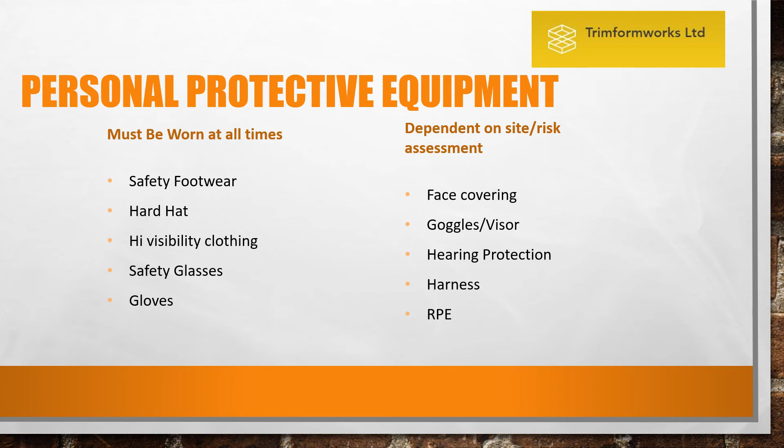Goggles and a visor may be required, such as in cutting activities like cutting of steel. Hearing protection may also be required where there's excessive loud noise. A harness would be required in certain circumstances while working at height. And RPE, respiratory protective equipment, would be required for some cutting activities, including cutting of plywood, any sort of wood materials, and the cutting of concrete.

Permits. The PSCS may require that you have a permit before completing works, and some permits may include hot works permits, close working permits, ladder permits, and confined space permits. Please check with the foreman and the PSCS what is required, and all controls are to be followed. Ensure that you have the correct permit in place before commencing works.

Housekeeping. Trim management will inspect work areas, plant and equipment, and require defects affecting health and safety to be rectified. A clear-as-you-go policy must be adopted and enforced. All equipment, waste and materials must be cleared away as soon as the job is complete. Warning signage is to be used where appropriate and cordless tools are to be used whenever possible.

On the right hand side of the screen you'll see two areas. The first area with the red X is a job that's been completed, however the materials weren't removed. The green tick below shows the same area after it has been cleaned.

Remember, housekeeping is your responsibility. If you make the mess, you clear the mess. Please ensure that you're working within a clean, tidy area at all times.

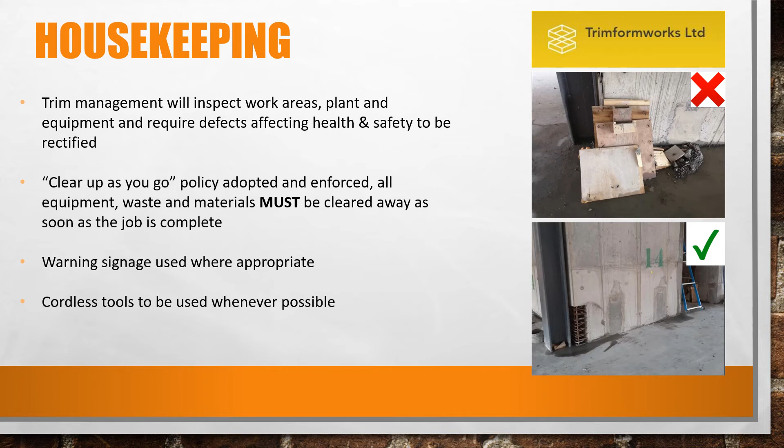Tools, plant and equipment. Only 110-volt tools may be used on the site unless otherwise agreed. Damaged electrical cables should be removed from site ASAP, such as what you see here on the right hand side with the red X. There's been two damages to the sheath and this could cause electrocution.

Do not operate or use tools, plant and equipment unless you're competent to do so. Do not operate any tools, plant or equipment that does not belong to you or another company without permission. All plant, tools and equipment are to be regularly inspected, tested and maintained. Should you bring new tools to site, please make sure they have been declared and added to the plant register.

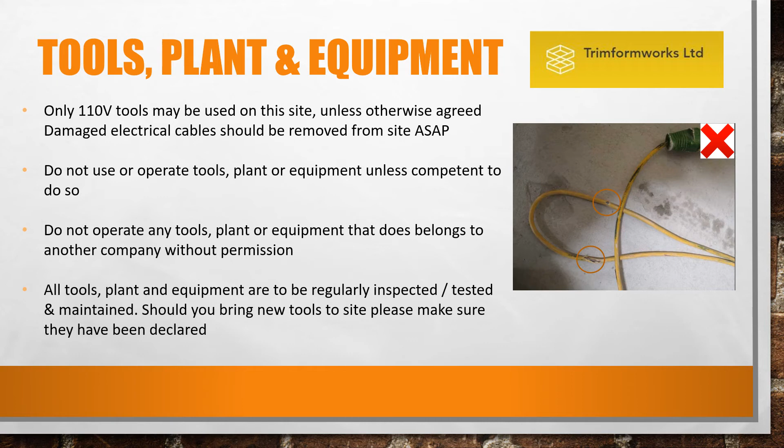Concrete. Concrete and cement products, if not controlled, can cause dermatitis, skin burns, skin sensitization, and eye damage. To mitigate this, you must ensure you clean up your work areas as you go. Avoid contact with the skin. Practice good hygiene and regular hand washing of the arms and the face.

Safe manual handling techniques should be used at all times, and you must wash thoroughly after completing. Use of barrier cream in this instance is also recommended. Full PPE must be worn at all times. There is no exception to this.

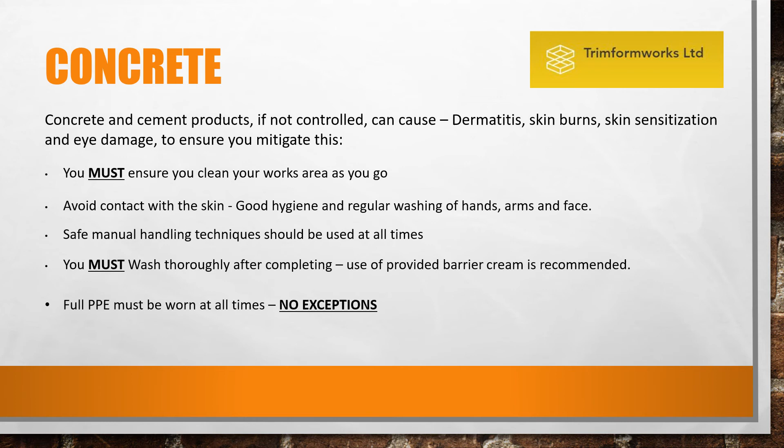Dust. Nuisance dust can often have long-term health effects as well as making you uncomfortable whilst working. If working in dusty conditions, adequate dust masks, either FFP2 or FFP3, and eye protection must be worn. Be aware of others in the area prior to creating dust and advise them that dusty works are about to commence. They may need to leave the area.

Minimize the chance of dust spreading by means of spraying water where possible. This will mean with an adequate connection and a dust suppression bottle—pouring water on the works area will not suffice. Ensure adequate ventilation is being considered where possible.

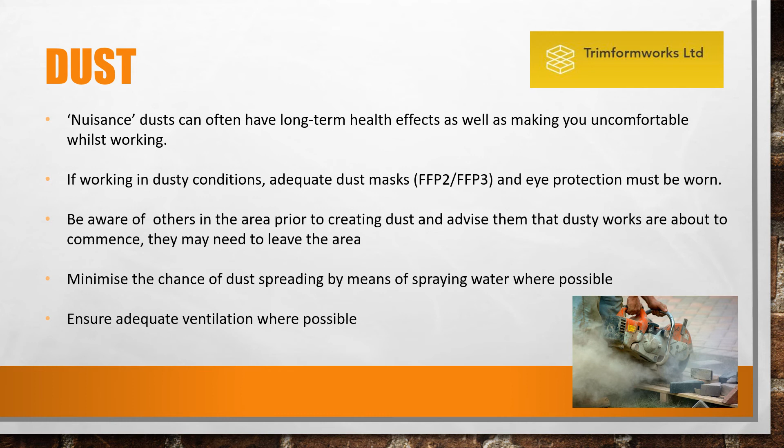Abrasive wheels. Powerful machines such as skill saws and con saws, if not used correctly, can cause serious injury. To use abrasive wheels, you must have been abrasive wheels trained. These machines should only be used and have replacement discs fitted by competent persons in accordance with the abrasive wheels regulations.

When using disc cutters, PPE must always be worn. That will include eye protection, gloves, dust masks, whatever the risk assessment mentions as reasonable PPE use, you must be wearing. Always inspect the discs for wear prior to use.

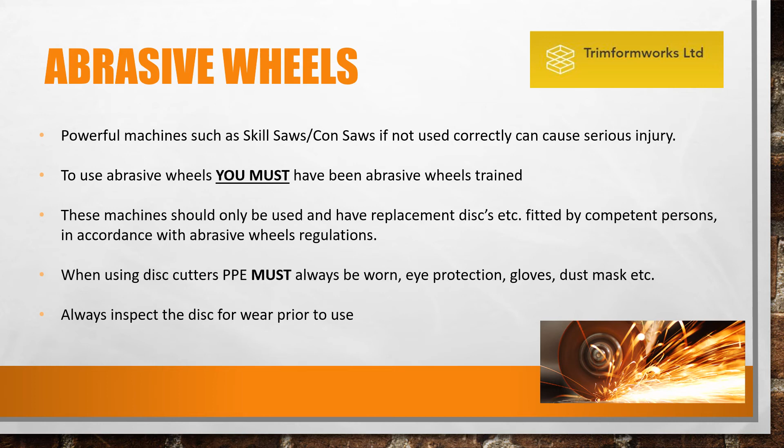Access and egress. Please ensure that you consider access and egress arrangements when you're working on site. Please comply with the following: keep all access and egress free from materials. Assess areas where you and your fellow work colleagues will be working. Consider emergency evacuation arrangements if there is an injury. Report issues with access and egress to a member of the trim management team who will work to get this corrected.

In the photograph shown, materials have been stored at the base of a ladder, making it difficult to access, and also would make it difficult should there be an emergency situation.

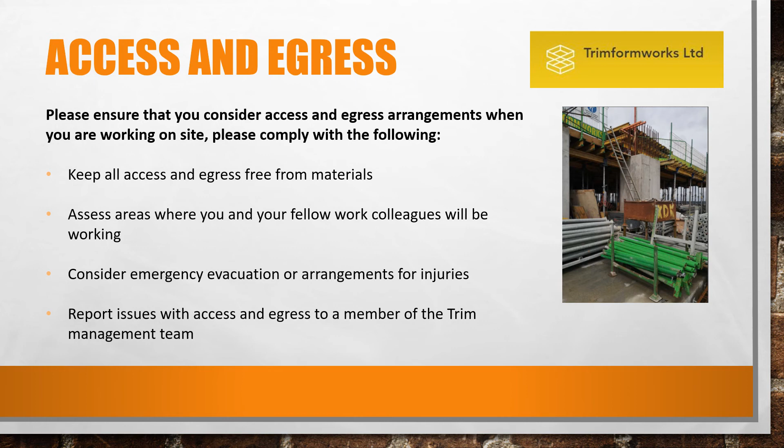Steel. Working in and around steel can be dangerous due to the risk of impalement, slips, trips and falls, and manual handling risks. To ensure these risks are mitigated, please ensure mushroom caps must be used on exposed steel.

This is your responsibility, and please all work together to ensure that this is being completed. Never block solid access routes with materials, as shown in the picture on the right hand side.

Before cutting, obtain a hot works permit with a fire extinguisher. You will also be required to wear goggles. Please ensure that this is done.

Clean as you go, do not leave offcuts behind, and ensure that no smoking is permitted on site. Should you require a smoke, you must do that in a designated area. Again, we need to all work together for the same common goal, and that's to ensure everybody's safe.

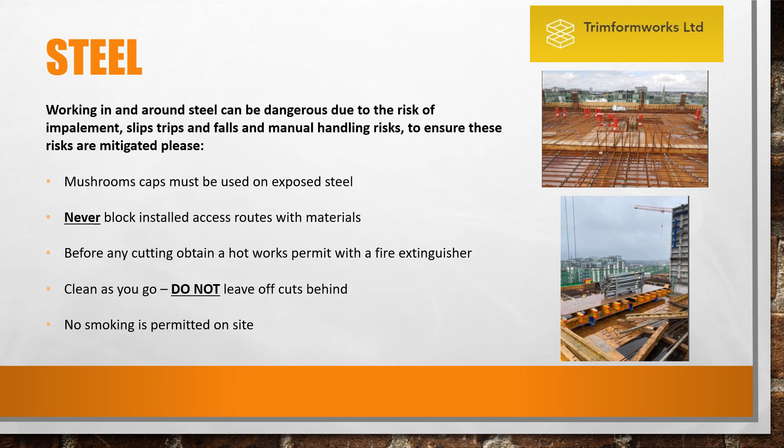Working at height. While completing the rising elements, shuttering or pouring, there will be a requirement to work at height. The nature of this works means that you'll no doubt be working at height at some stage, and the following should be followed. Training for all those who plan to work at height, you must complete some working at height training.

MEWPs or PoPs must be used where reasonably practicable, and ladders are to be used as a last resort for short duration works. Ladders must be tied off or footed, a harness must be worn while working at height, and no works are to be completed near a leading edge where the height exceeds the handrail.

The photograph on the right hand side was taken of an operative working with no harness at the edge of a building. Should he have fallen, the consequences would have been very severe.

Concrete must be poured from a suitable platform. If no suitable platform is available, please ensure the site management is made aware in good enough time.

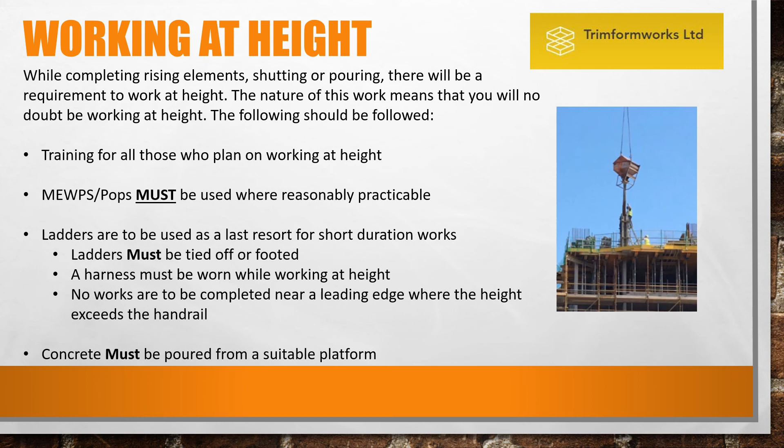Ladders. Ladders are only permitted for short duration works where podium steps or mobile scaffold towers will not be suitable. A harness will be required while in use, and the ladders must be constructed of sound material and free from defects. Ladders must be visually inspected before use and checked weekly and added to the ladder register.

Broken or damaged ladders must never be used. Keep 3 points of contact to the steps at all times. Never overreach. This is the most common cause of falls from ladders.

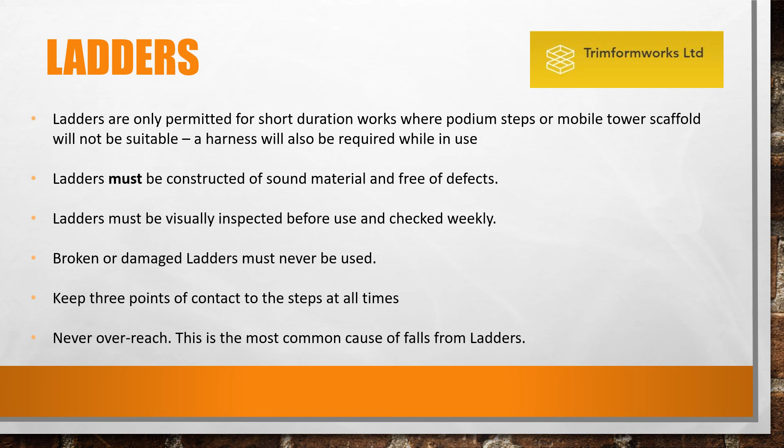Scaffolding. Only trained and competent personnel are to carry out scaffolding erection or dismantling. Never interfere with the scaffolding, especially ties or boards, and never throw items from scaffolding.

Check that scaffolds are complete before using them. Partially erected or dismantled scaffolds must not be used, and ensure that scaffolds are not overloaded or cluttered with debris. Always use ladders to gain access to scaffold and never climb the standards.

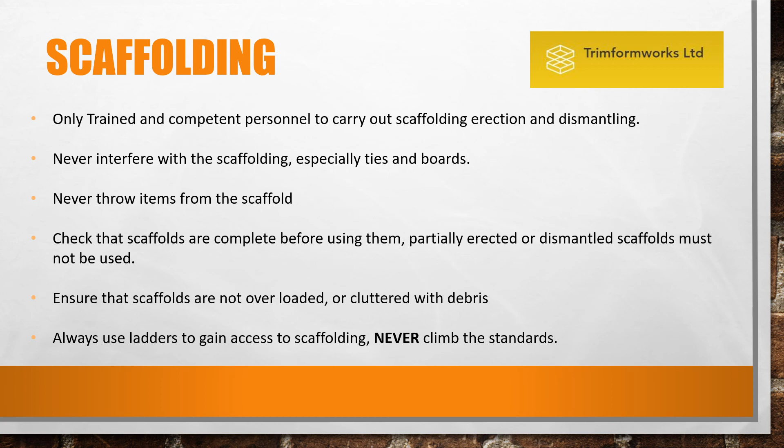While we don't deal with scaffolding per se, we may from time to time need to be working from this area. Please ensure it's safe to do so.

Environment. All employees of TRIM should ensure all waste is placed in correct skips or bins. Employees must ensure that all waste, where possible, is added to the relevant waste receptacle and not general waste skip containers. Do not burn waste on site.

Do not dispose of surplus materials which may be reused. Do not leave engines running on vehicles unnecessarily. Where possible, avoid creating dust, and reduce the site waste by returning packaging and pallets with suppliers if applicable.

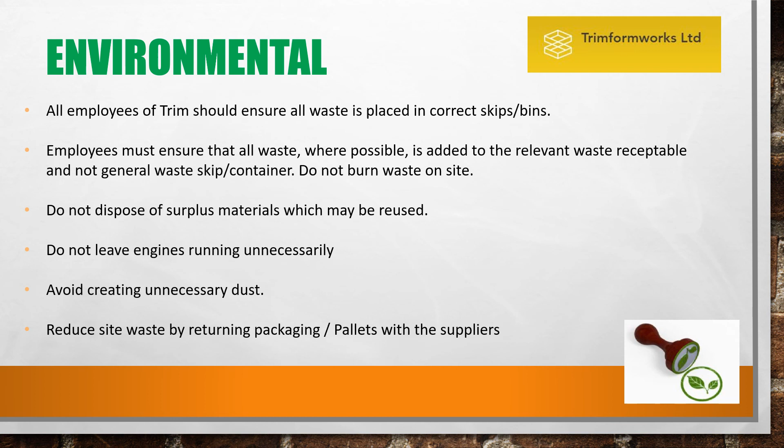Respect at work. It is expected that respect will be shown to all of your workmates regardless of their nationality, religion, race, or any disabilities that they may have.

Should you be seen to be disrespectful at any stage regarding either of these topics, it could result in suspension and ultimately removal from site.

Lastly, if you have any questions off the back of this induction, please contact the site manager when you do go to site, or alternatively direct your questions to the EHS manager, Liam Kelly.